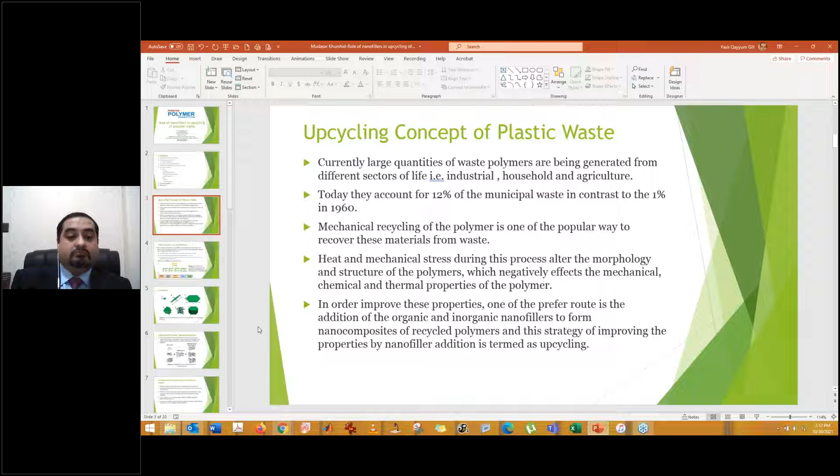Excuse me, Dr. Yasir, can you put your slides in presentation mode, please? Okay. Okay, continue, please. Thank you.

Upcycling concept of plastic waste.

Everybody knows that there is a huge quantity of waste polymer being generated from various sectors of life, throughout the world. It is not related to a specific area of the world—you can't just blame Asia or Europe, it is throughout the world. These sectors are industrial, household, and agriculture.

Today, they account for 12% of municipal waste, in contrast to only 1% in 1960. This ratio can vary depending upon the area, but roughly they account for 12%.

One of the options that the world has utilized in the past and is still being utilized is mechanical recycling of plastic waste. Apart from mechanical recycling, we can also go for landfill, or we can go for incineration or pyrolysis. These areas do offer some advantages, but more or less the products that we develop through them are not of high value, and landfill obviously is not a very good option anywhere in the world.

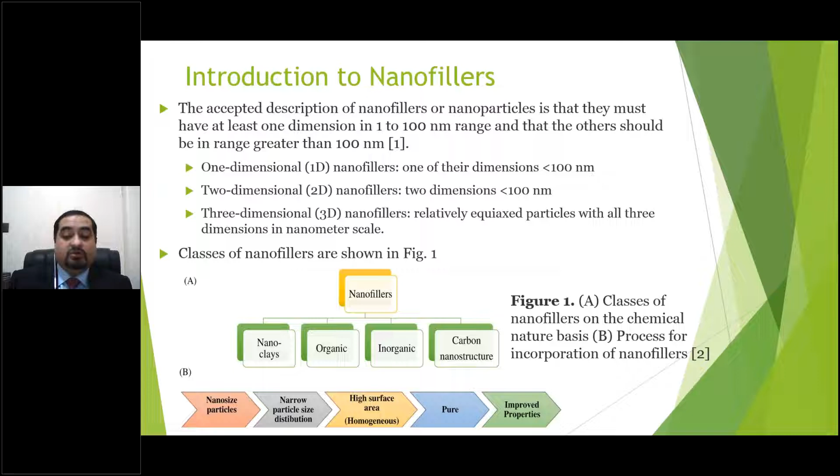We try to make sure that nanofillers are as pure as possible without including too much surface modification. If we incorporate these categories of nanofillers into our polymers, we get improved properties.

There are various nanofillers that you will encounter in the market. Those could be present in the form of a nanoparticle, nanorods, or nanoplatelets.

But when industry tries to utilize them in their polymers, what they end up seeing through a scanning electron microscope or transmission electron microscope are rather their aggregates, or sometimes an assembly of aggregates where different aggregates combine to produce a structure not reminiscent of a nanoparticle.

So they ask the question: we added nanoparticles or nanorod material into our polymer, why can't we visualize it with the help of a microscope? Because the overall structure is present in the form of agglomerates or aggregates.

So our goal is to make sure that once we incorporate the nanofillers within our polymers, we get the least amount of aggregates or agglomerates as they are known. Unfortunately, we cannot eliminate them, especially once we move towards higher weight percentages.

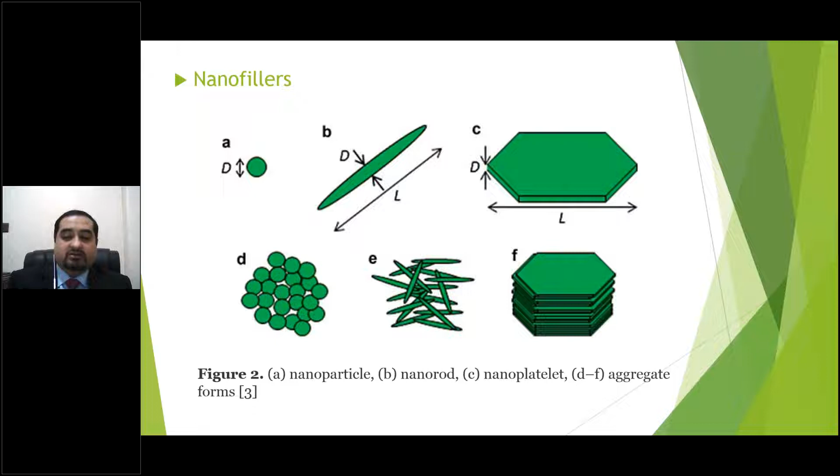One point now being realized by scientists throughout the world is that if we incorporate more and more nanofillers, or higher weight percentages of them, aggregates form in quite large quantities.

So what we can do in upcycled polymer nanocomposites is try to incorporate these nanofillers into our waste polymer and make sure that they remain separated, so the aggregates don't form. This is our basic requirement for any method being used, and this is the goal of this research.

Now, the various methods most of you would know about that can be used for incorporating nanofillers in plastic include melt blending, in situ polymerization, and chemical method.

Now, the most effective method in terms of production value is melt blending, because through melt blending we can use various techniques such as extrusion, injection molding, and other thermal processing methods to ensure our nanofillers get incorporated within our polymers, and we get enhanced dispersion and distribution of the nanofiller along with the removal of agglomerates or aggregates or assembly of aggregates.

If we are able to ensure that, then those polymer properties will be enhanced by the addition of nanofillers. So by keeping in mind this concept...

A number of research works have been carried out within our Department of Polymer and Process Engineering, and I have also carried out this research during my PhD in the Department of Materials at Loughborough University. I would like to discuss a few of those research works with you, showing how by utilizing these various types of fillers we were able to enhance the properties of the polymer.

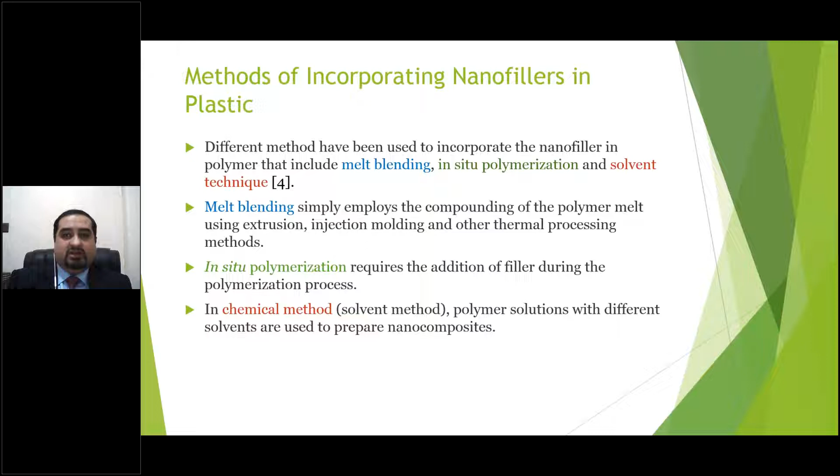Now, the first such research is a comparative study of carbon-based nanofillers for improving the properties of HDPE for potential applications in food tray packaging.

Most of the time, the products we try to develop are those that are in demand in the market, and nothing is more in demand than packaging. Everybody needs packaging, and my second talk is on that point, so we'll continue about that area. This research was published in Polymers and Polymer Composites.

So what did we do in this research? HDPE was blended by a specialized technique with various carbon fillers to produce various composites that included the incorporation of multi-wall carbon nanotubes, graphene oxide, and carbon black on a twin screw extruder. The morphology was characterized and then correlated to the mechanical, thermal, and barrier properties.

The results basically showed us that there was a distinct effect of carbon black on mechanical, thermal, and barrier properties of HDPE in comparison to multi-wall carbon nanotube and graphene oxide.

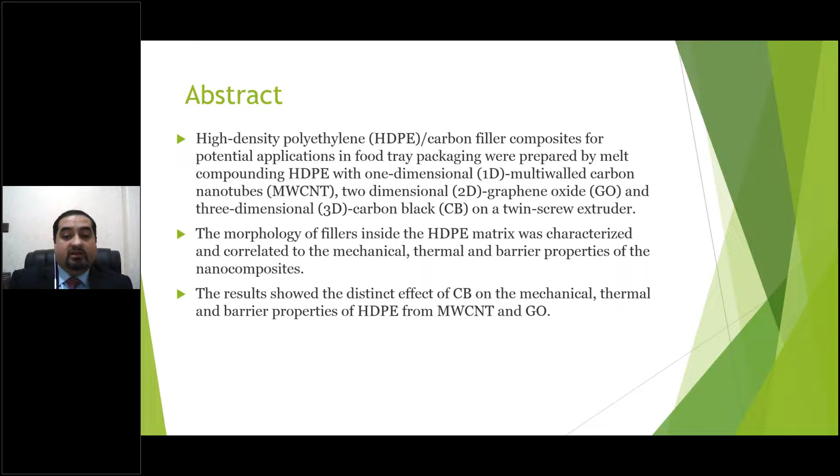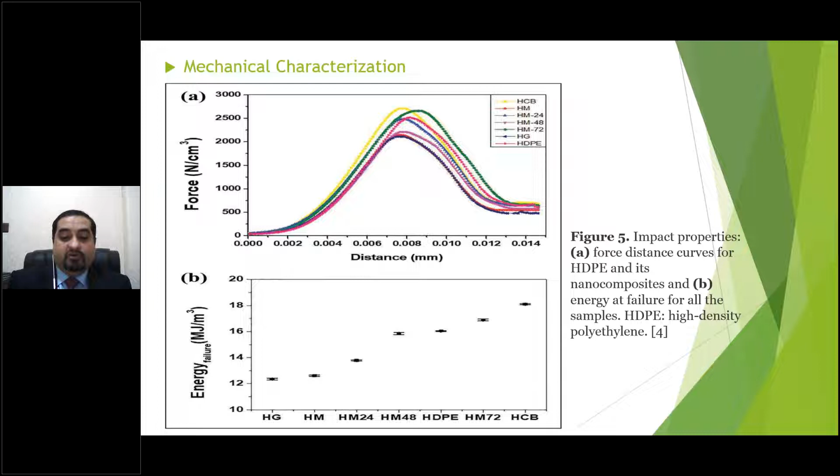We started doing the mechanical characterization of these specimens, and the impact properties showed an enhancement in the properties of carbon black based material in comparison to the other materials we incorporated. This basically gave us a heads up that these materials can be incorporated to produce polymers with enhanced properties. The mechanical characterization showed similar results.

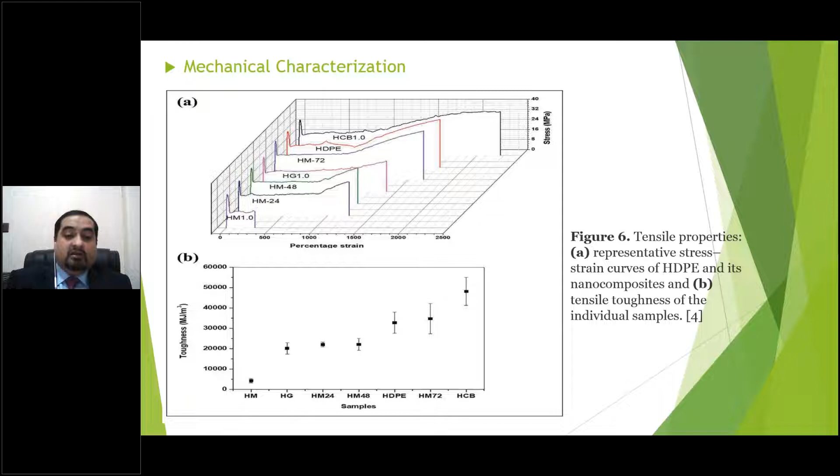Carbon black gave us superior properties in comparison to carbon nanotubes and graphene oxide. We also did water vapor transmission and oxygen transmission testing, and the results were consistent with what we found previously, because the role was played by the platelet structure and morphology of the nanofiller. In this case, graphene gave better properties compared to carbon nanotube and carbon black based particles.

In another research area, we developed HDPE composites with improved mechanical properties using calcium carbonate and nanoclay to reinforce the material. We studied the effect of fillers on tensile strength, toughness, impact strength, and other properties, and found that Young's modulus increased by up to 22.5% for the ternary nanocomposite combining calcium carbonate, nanoclay, and HDPE.

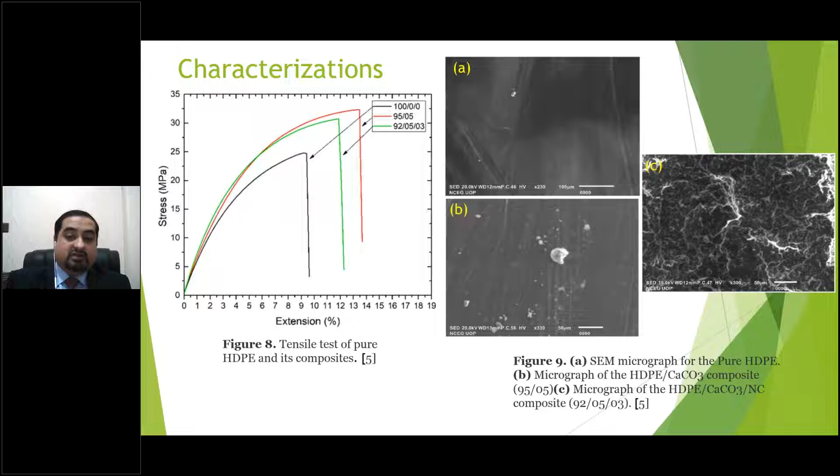We then looked at tensile strength and found enhancement in those properties. We compared 100% HDPE with a 95:5 calcium carbonate based specimen, and a 92:5:3 weight percentage blend of HDPE, calcium carbonate, and nanoclay. Uniform dispersion was achieved, and we saw enhancement in mechanical properties with the incorporation of calcium carbonate. Similar results were obtained for tensile strength, toughness, and Young's modulus.

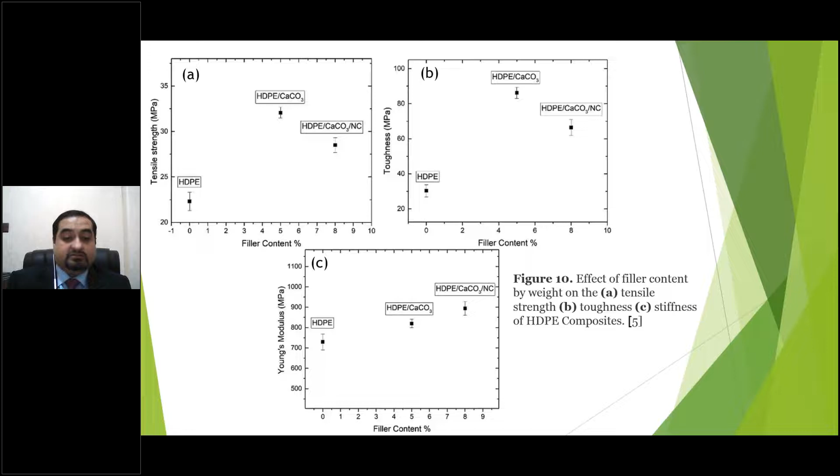Our primary objective in carrying out all of these researches is to incorporate these nanofillers into polymer waste such as HDPE, polypropylene, polystyrene, polyethylene terephthalate, polymethyl methacrylate, and polyvinyl chloride, and then enhance their mechanical, thermal, optical, and barrier properties depending on our requirement.

What is the primary requirement, and where will all of this recycled material go? One starting point could be automotive products. We can take waste, such as polypropylene waste from the masks we use daily, and enhance it using nanofillers to produce various products for the automotive area. My own MSc student, Mr. Mudassar Khurshid, is working in this area with Grand Engineering Private Limited, one of our sponsors for this research, who also produce a lot of automotive parts.

So this is a brief summary of the work we have done in this field, and these are a few of the references we have used.

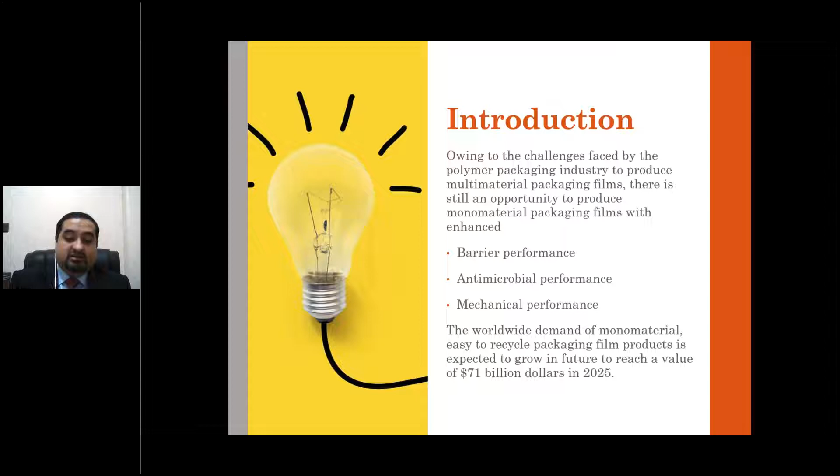And it is also expected that if the monomaterial properties are enhanced, this whole monomaterial based industry can reach an estimated value of $71 billion in 2025. So what are the various trends that the experts are talking about in terms of sustainable packaging? In 2019, the primary trend was to make sure that you design a packaging so that it can be recycled and it can be reused.

Then the next one was replace the plastics with bioplastic or paper and try to remove the packaging. Then at number 6 came the point of trying to move towards monomaterial. You ensure that monomaterials are being used.

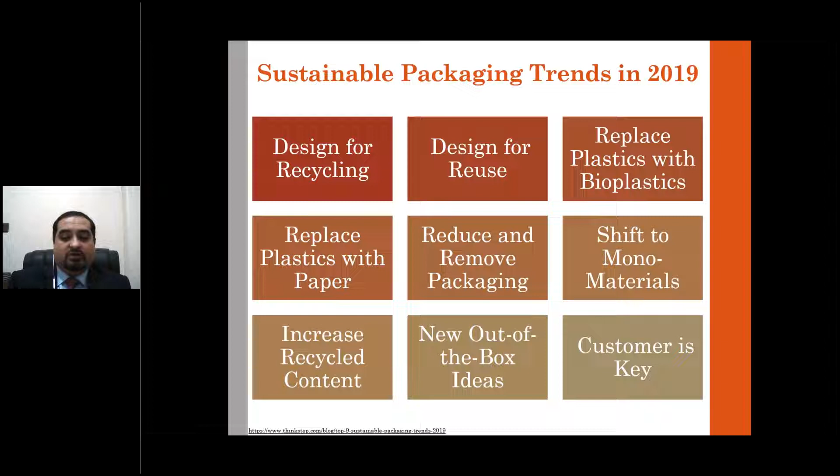Another option that the industry has now adopted quite a lot, you will now start seeing these trends in your shampoo bottles, where the company would write down on the shampoo bottle that their bottle contains 70% recycled content. Another company would say our bottle contains 80% recycled content. So more and more products are now being reused in the packaging, and the rest of the two are: customer is the key, and new out of the box ideas should be adopted.

So in 2020, the trends for sustainable packaging recognized the utilization of monomaterial or single layer plastic as the most primary or important trend that is now being adopted. We have to move towards monomaterial. Multi-layer, multi-material based structures are very good. They are excellent. There is nothing that we have against them, but their recycling causes quite a huge hurdle. And in order to solve them, we need to alter them and replace them.

Reducing the plastic components altogether, that was also one of the packaging trends. Then the same one was repeated: reuse, utilization, replacement with bioplastics and biopaper. With regards to bioplastic, you do need to realize that they have a huge problem with regards to their price. Their price is too high, even up to now.

In Pakistan, the minimum that you can get is 800 to 900, and even those materials don't have the desired quality. Good quality biopolymers, PLA, PBAT, PBS, start at 1200 or even higher prices per kg. Those are the prices in the market. So bioplastics, although a good option, at the moment can't directly replace the multi-layer structures.

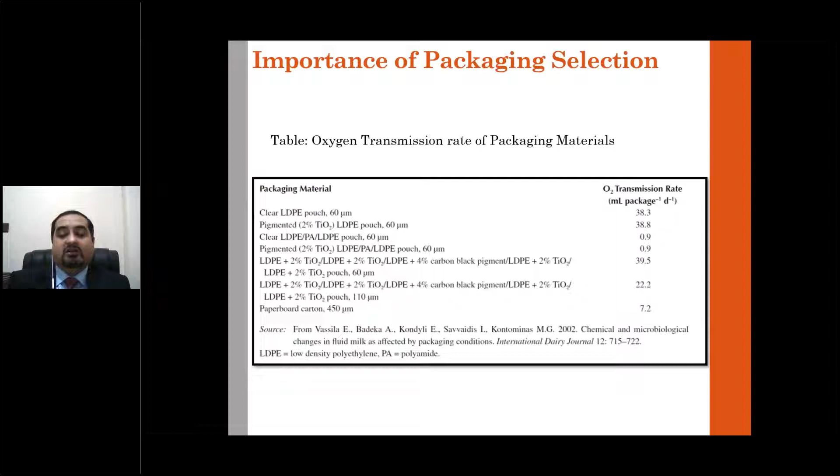When we tried to process these materials through thermoplastic processing using extrusion, we found out through scanning electron microscopy results that there was clear phase separation between the nylon and the LLDPE. Then we tried to enhance this through various compatibilization techniques, and this research is still being conducted, so that is why I have not included the results.

But just to show you that these are the problems you will end up with if you try to recycle these multi-layered structures directly. You then have to make sure that you incorporate other modification techniques in terms of compatibilizers, in terms of chemical modification, to get the desired results. So the recycling of multi-layered structures on its own is not a good option.

So what we can do with these multi-layered structures is separate them out. Separating is another problem on its own. If you try to separate them out, you first have to remove the internal vapor deposited aluminum layer. You then have to separate out the adhesive.

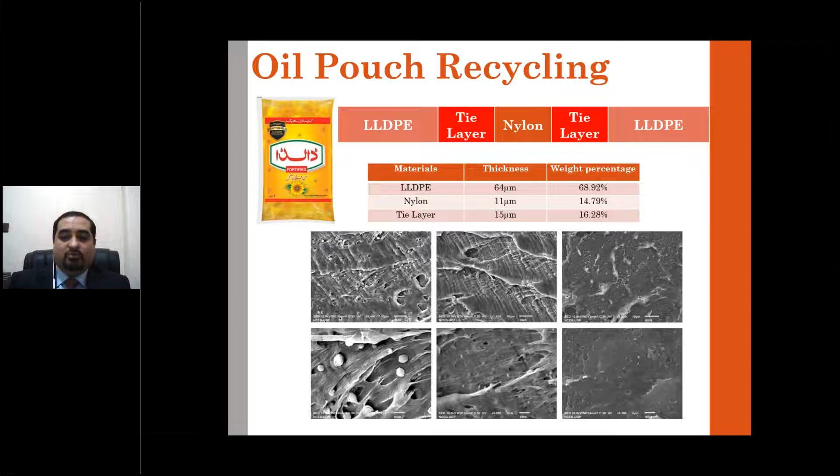You then have to remove the ink. Then you end up with a lot of junk material or a waste material on its own. And from there, you will be able to recover the HDPE layer, polyethylene terephthalate layer, and biaxially oriented polypropylene layer, or simply oriented polypropylene layer. So then it becomes a huge challenge for us. So what are the options that we can adopt?

If these are the problems, we can adopt a single layer printed packaging, or multi-layer monomaterial printed packaging. But even then, in terms of recycling, this will still cause a problem. Or we can move towards a single layer non-printed barcode packaging. This is what our group is trying to now suggest, that remove all the printing. If we remove the printing, we can use the barcodes, and that can be very effective. Or we can use the same multi-layer structure, but you need to down gauge them.

So in what direction are we moving within this Department of Polymer Process Engineering? We are trying to adopt the technique through which we can develop multi-layer monomaterial based structures, or single layer structures that will have enhanced properties. And one of the routes that can be adopted in enhancing the properties of polymers so that they can meet all the requirements is by the utilization of various nanofillers. So polymer nanocomposites can be adopted to enhance the properties. These include clays, graphene, silicates,

and as a result of them, we always try to enhance the barrier performance against water, oxygen, and carbon dioxide. And we try to achieve these properties by making sure that we get a good tortuosity path created within the polymer by the addition of nanofiller. We get enhanced dispersion and distribution of the nanofiller, and we try to eliminate or restrict any of the agglomerates.

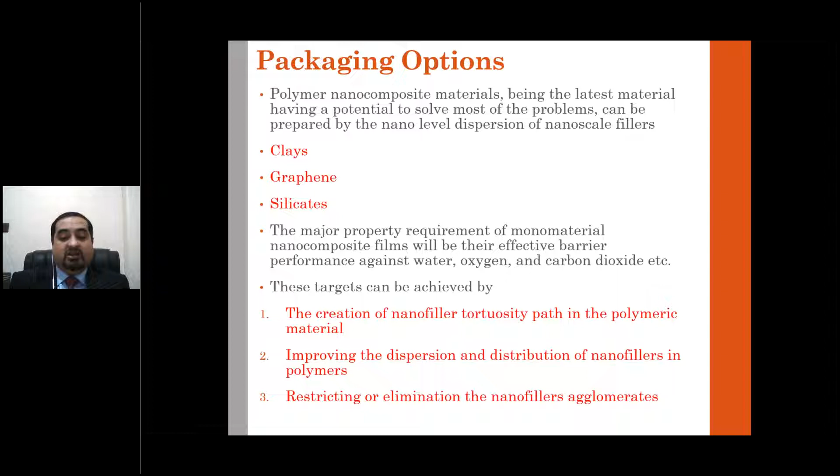Now within this, I have worked in this area in the past, and I am still working in this area. One of the case studies is the permeation characterization and modeling of polyethylene clay nanocomposites for packaging. It was published in Polymer Bulletin. In this work, we utilized kaolin clay and sodium MMT clay to enhance the overall properties of HDPE so that it can then be utilized in the industry.

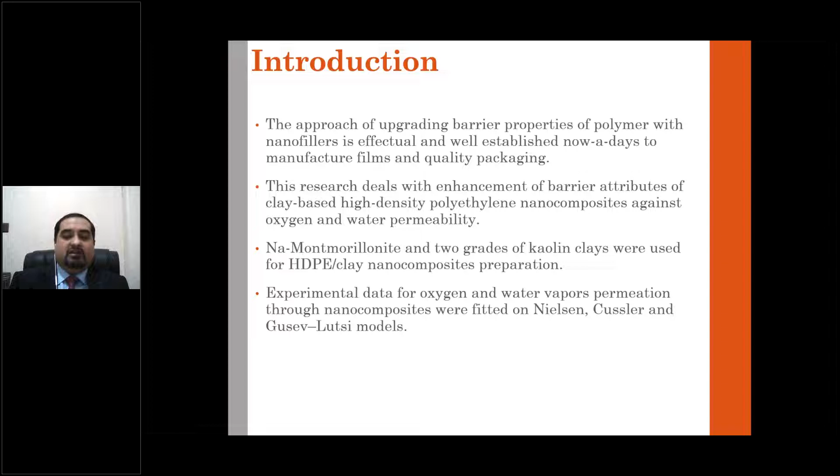So based upon these initial results, we were then able to compare what would happen if our material is fully exfoliated, what sort of properties we can expect, and if it is not exfoliated, then just by utilizing the pre-blending techniques, up to what extent we can get enhanced properties. There are other options of intercalation or macro composites that can be studied based upon these initial results.

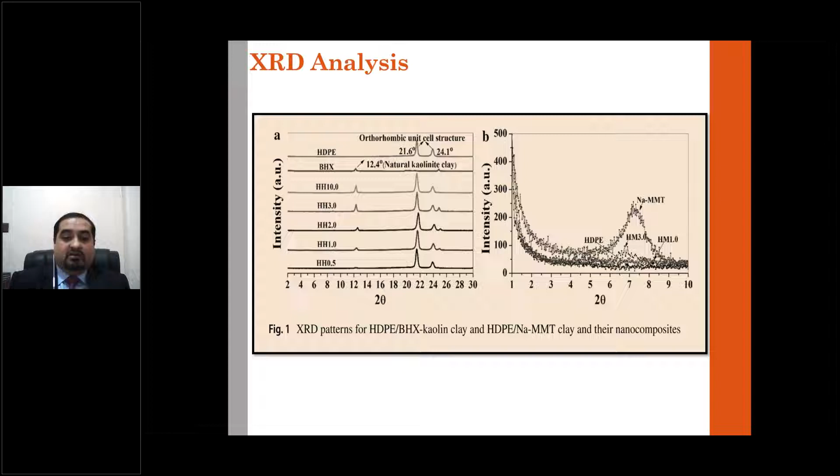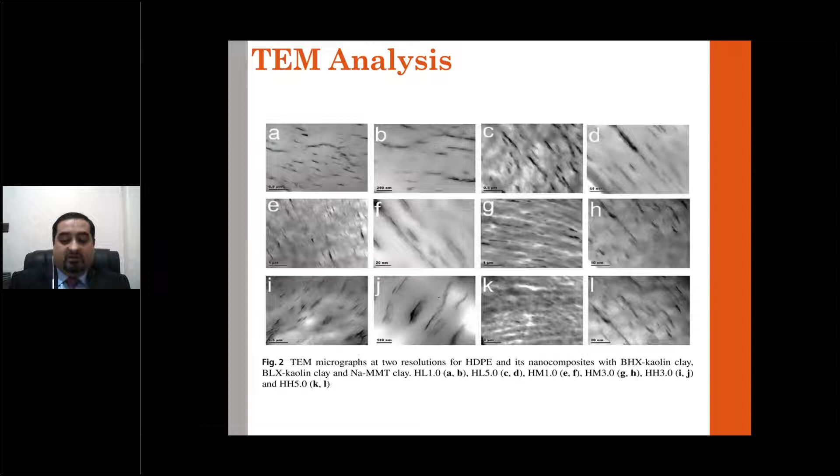Now the TEM results showed good dispersion and distribution, but also the presence of a few agglomerates, but most of the time the tortuosity path was there, and along with it, good dispersion and distribution of nanofillers within our material. We then looked at the overall aspect ratio calculations by utilizing the TEM results along with ImageJ, and we found out that we were able to get a good aspect ratio.

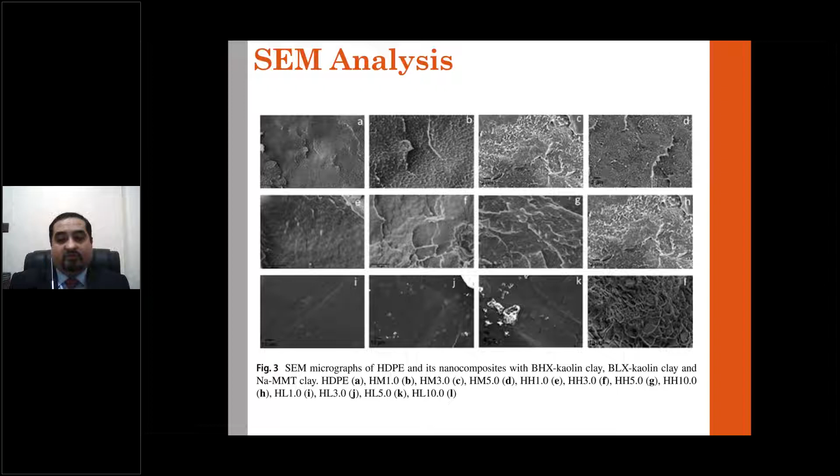Now, one of the things that you need to understand is that in terms of kaolin, we were not able to separate out individual layers, but there was a combination of layers present in the form of an aggregate. This aspect ratio basically represents the overall dimensions of those aggregates. SEM results also showed us good dispersion and distribution, and only for very high weight percentages did we get a few agglomerates and some phase separation within our material.

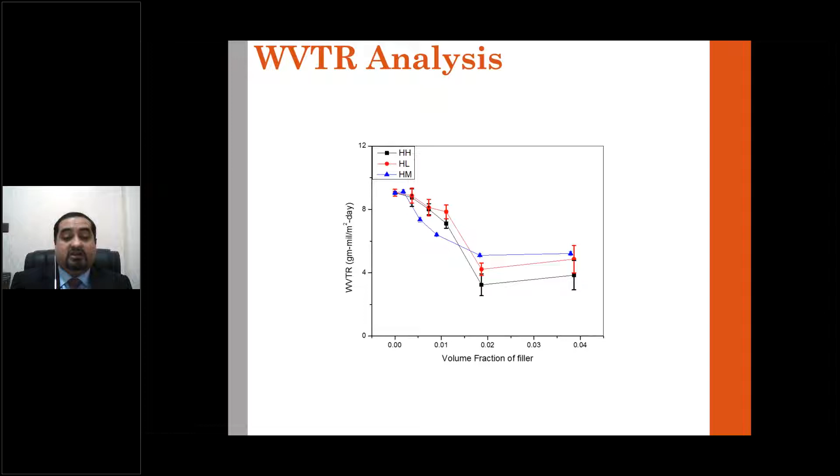WVTR analysis, or the water vapor transmission rate, which is of prime importance, gave us good reduction in the properties and showed us that if we try to incorporate up to 5 wt%, then the water vapor transmission rate will decrease. The same was true for oxygen transmission rate. Along with these properties, we also analyzed the internal morphology by utilizing polarized optical microscopy, and it showed a reduction in the overall size of the spherulites by incorporating various nanofillers.

So in terms of summary, we were able to get good reduction in the WVTR and O2TR by utilizing up to 5 wt%. As we move toward 10 wt%, the enhancements started to deteriorate, and we then found out that this is the range up to which we can expect good results in terms of the barrier properties and also in terms of internal morphology of the polymer.

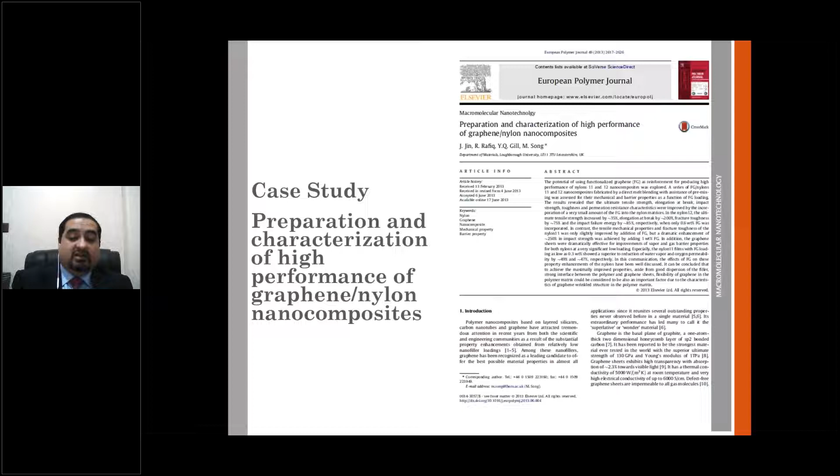Now, another work that has been done by myself in this area is for the high performance graphene nylon nanocomposites. In this area, we were able to develop nylon 11 and nylon 12 functionalized graphene nanocomposites to see what sort of effect it would have on the ultimate tensile strength, elongation at break, impact strength, toughness, permeation resistance, by incorporating as low an amount of functionalized graphene as possible.

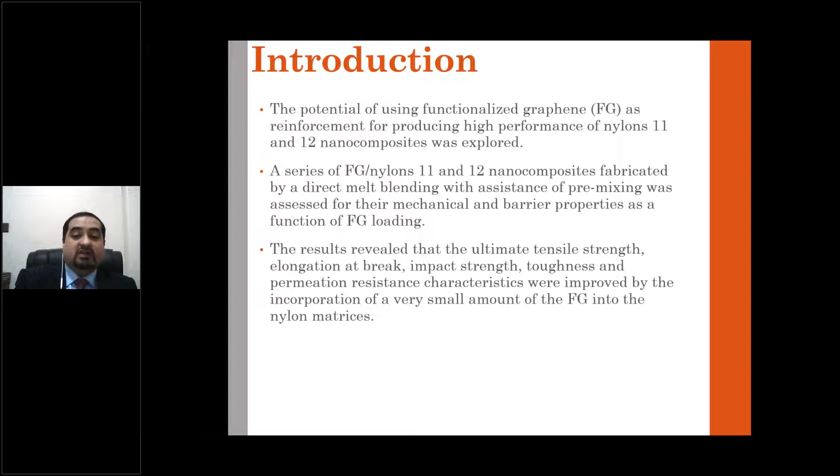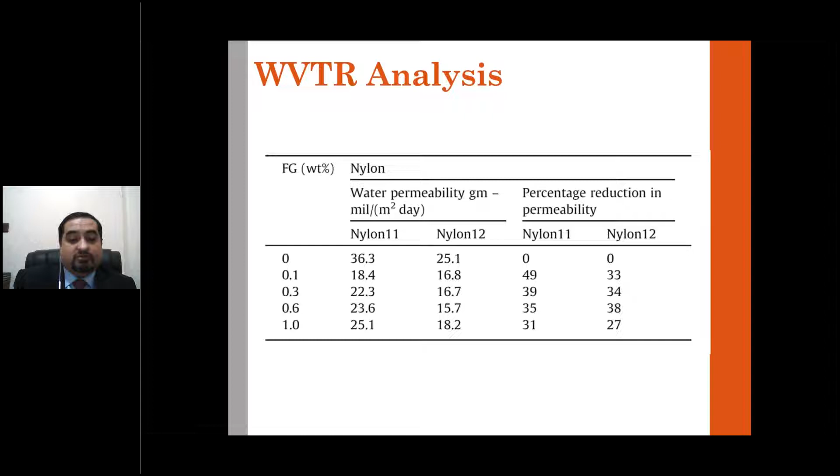So based upon these results, what we can conclude is that if we are able to use monomaterials based upon the two case studies that we have just discussed, and if we are able to then combine the monomaterials with the various nanofillers added into them to produce multi-layered structures, those would then be upcyclable.

Okay, because of the presence of nanofillers, we have already established that if nanofillers are present and you get good dispersion and distribution, and make sure you get good interaction between the polymer and the nanofiller, you will be able to get good upcyclable material. And finally, based upon the various requirements of the future, we can then incorporate various functionalities into our polymer to get materials that are much more smart.

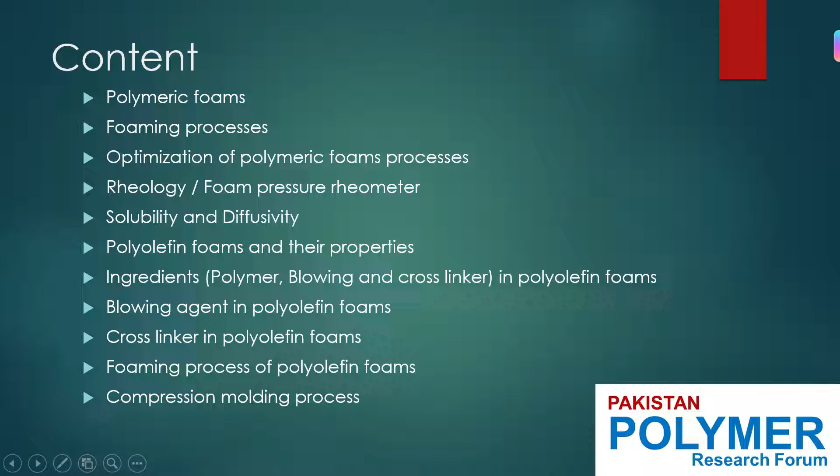Okay, so starting from polymeric foams. Polymeric foams are polymers that contain cells dispersed throughout the polymer matrix. And use of polymeric foams in today's technology continues to grow at a rapid pace throughout the world. There are numerous reasons for such growth, which include the key properties of polymeric foams, including lightweight, excellent strength to weight ratio, superior insulating abilities, energy absorbing performance, including shock, vibration, and sound, and the comfort feature of polymeric foams.

According to marketresearch.com, the global polymeric foam market size is expected to reach $153.8 billion by 2027 at a compound annual growth rate of 3.8%, while the global polyolefin foam market is expected to reach $12.53 billion by 2027, growing at a CAGR of 7.2% from 2020 to 2027. This data has been taken from marketresearch.com.

So, in continuation of the introduction of polymeric foams, they can be viewed from different perspectives, which include their density, cell size, expansion ratio, foam morphology, etc. Speaking individually, if I talk about the density range, they range from 1.6 kilogram per meter cube to over 960 kilogram per meter cube. And if I talk about the expansion ratio, they can be viewed as high density, medium density, low density, and very low density. All have their certain ranges. And if I talk about the foam morphology, they are classified as open cell or closed cell foams.

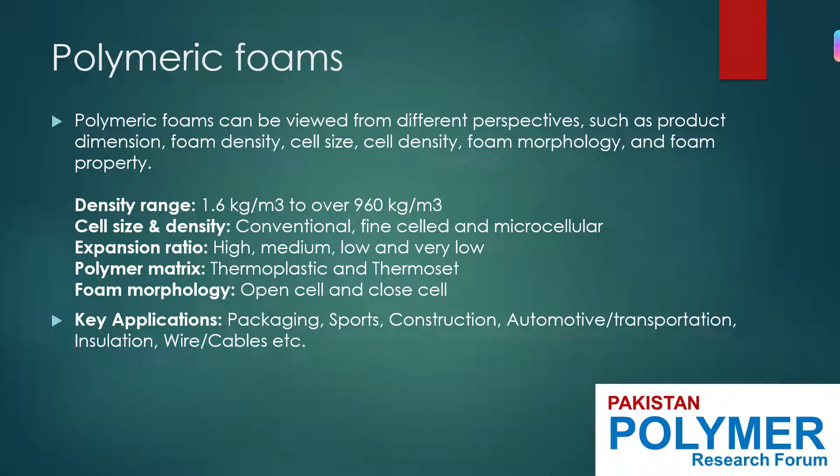As an introduction, if I talk about the key applications of polymeric foams, they include packaging, sports, construction, automotive, transportation, insulation, wire and cable, etc. So moving ahead with the foaming process, most foam polymers are produced by dispersing a gas throughout a fluid polymer phase and stabilizing the resultant. It is a complicated phenomenon which involves thermodynamics, reaction kinetics, melt gas rheology, gas diffusion, and permeation, and others.

Foaming of polymers can be carried out either by mechanical, chemical, or physical means. Thermal decomposition of blowing agents, generating either nitrogen or carbon dioxide or both by application of heat and pressure. I'll be talking about this process, by the way. Secondly, there's volatilization of low boiling liquids within the polymer, incorporation of microspheres into a polymer mass, expansion of gas-filled beads by application of heat, or expansion of these beads in a polymer mass by heat of reaction.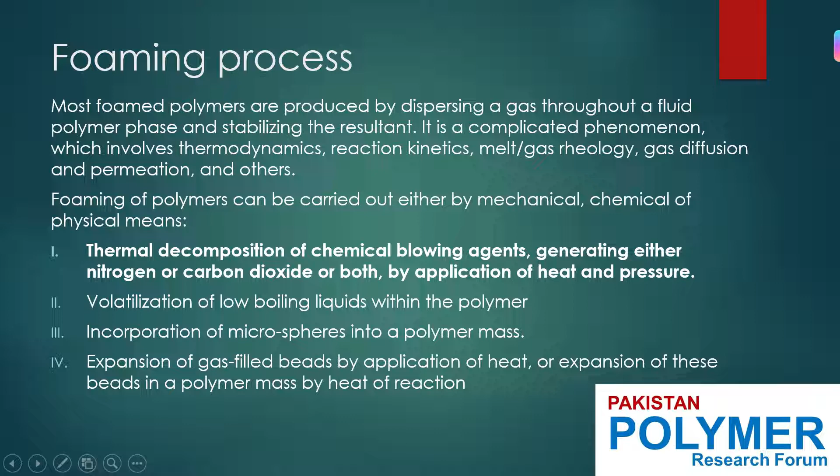Coming to the core of my work, which is optimization of the polymeric foam process. Although I'll be talking about polyolefin foams, at first I'll be covering polymeric foams in general. If I convert them into steps, the steps that we need to follow to optimize any sort of polymeric foaming process, we can split into 6 steps.

Number one is polymer analysis. Whatever the polymer is, it could be EVA, it could be PU, it could be any other polymer, we have to make an analysis of the polymer to understand what properties that polymer has so that we can get those properties in the end product. And the second step is chemical characterization of chemical blowing agents, cross-linking agents, or other ingredients which are present in a certain formulation.

The next step is rheological investigation, which includes shear viscosity, extensional viscosity, and similar factors. The next is gas solubility measurement, number five is gas diffusivity measurement, and the last step is cell nucleation and growth study.

Moving on to optimization of the polymeric foam process, as mentioned earlier, we have to follow certain steps. I won't go into the details of polymer analysis and chemical characterization of different ingredients. I'll be talking about rheology first.

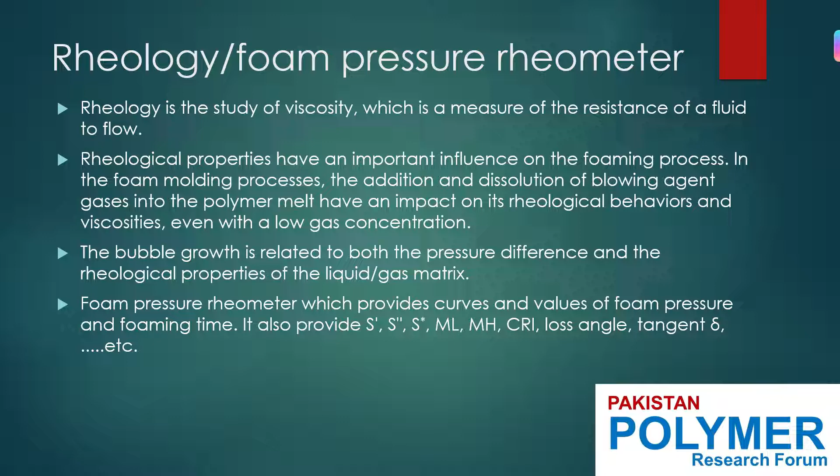After rheology, I'll talk about solubility and diffusivity measurements. Starting with solubility: foam production involves preparing a single phase, which includes the polymer and blowing agent solution, followed by generation of bubbles, also known as cells, triggered by thermodynamic instability, and then stabilizing the bubble structure in the surrounding medium. This is a generic foaming process.

Solubility defines the maximum amount of gas that can be dissolved in a certain polymer under a certain pressure. To generate the thermodynamic instability that triggers foaming, the surrounding pressure has to be lowered beyond the solubility pressure. Therefore, solubility and related information are quite important for the foaming process. There are also certain mathematical methods available to measure solubility.

I'll not be talking about the details of those methods, which can be provided on request.

The next thing is diffusivity. Cell growth is driven by the pressure difference between the cells and its surrounding, with the blowing agent diffusing into the cell. Generally, a blowing agent with lower diffusivity has an edge advantage to produce large expansion foams. So you can see how important these parameters are, the solubility and diffusivity.

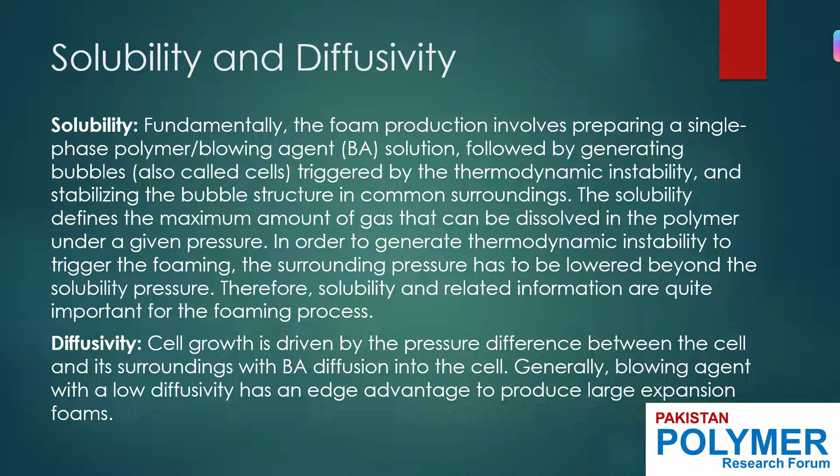Polyolefin foams. Now I'm coming to the core of my work, which is based on polyolefin foams. Polyolefins are tough, flexible, and resistant to chemical and abrasion. These are their physical properties.

Most polyolefin foams have a closed cell structure, which makes the foam suitable for applications where buoyancy is important. That's why they're used in leisure and sports related applications. They can also provide a certain amount of resilience, and that's why they're used in related applications.

If I talk about polyolefin foams, the certain polymers that come under the banner of polyolefins include polypropylene, polyethylene, and EVA, which is ethylene vinyl acetate. Based on the basic properties of the polymer, we can get the same properties in the end product also.

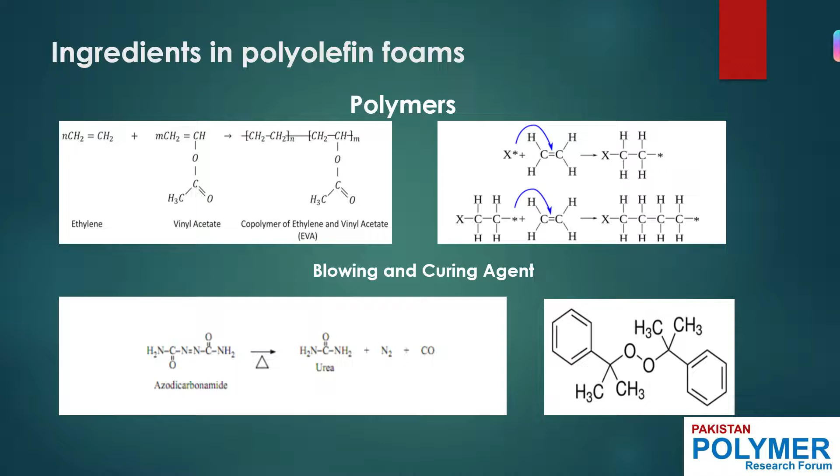Moving ahead with the blowing agents in polyolefin foams, most polyolefin foams are manufactured by dispersing a gaseous phase throughout the polymer matrix. This is a generic polymeric foaming process. The substance that produces cellular structure in the polymer is defined as a blowing agent.

The gas used for foaming can be classified into two categories based on the mechanism: physical blowing agents and chemical blowing agents. While choosing a chemical blowing agent, it is very important to consider two things. The first is the decomposition temperature of the chemical blowing agent. It should not be too high.

If it is too high, the polymer melt strength is low at the foaming temperature and is not strong enough to maintain the bubble structure. And if the decomposition temperature is too low, the polymer melt is too rigid, which constrains foam expansion. The other issue is the residue of decomposition products and the generated gases from a chemical blowing agent.

Commercially, there are different chemical blowing agents available, which include DNPT, dinitrosopentamethylenetetramine, also ADC, azodicarbonamide, and OBSH, oxybisbenzenesulfonyl hydrazide. But for polyolefin foams, mostly ADC is used.

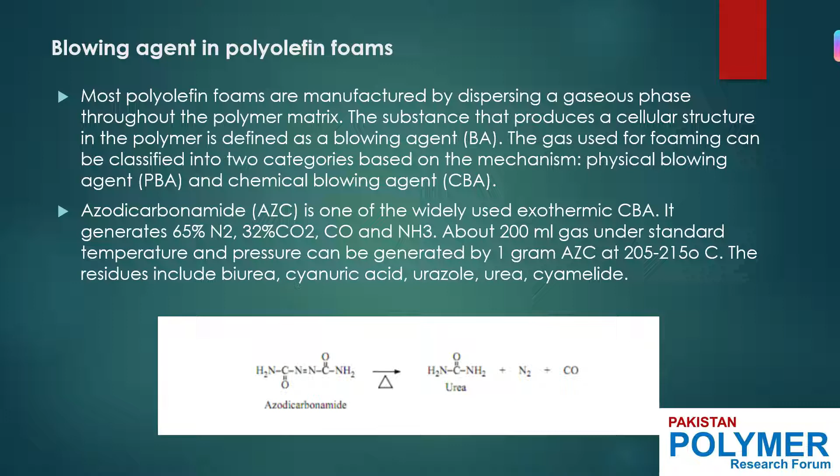The next important ingredient after the blowing agent is a cross-linking agent. Cross-linking is basically a chemical bond between adjacent polymer chains. For polyolefin elastomers, there exist three main types of cross-linking procedures.

Physical cross-linking by electron or gamma radiation, chemical cross-linking by agents such as peroxides, and silane cross-linking. I'll be talking about peroxide cross-linking.

Generally, the reaction of peroxide decomposition is first order. The rate parameter is called the half-life time, which describes the time needed for the decomposition of 50% of peroxides. So the selection of proper peroxide is based on its decomposition temperature.

Foaming process in polyolefin foams is almost the same as in any other polymeric foaming process. It can be divided into two major classes: the continuous process or the batch process. Compression molding, which I am concerned with, is a batch process.

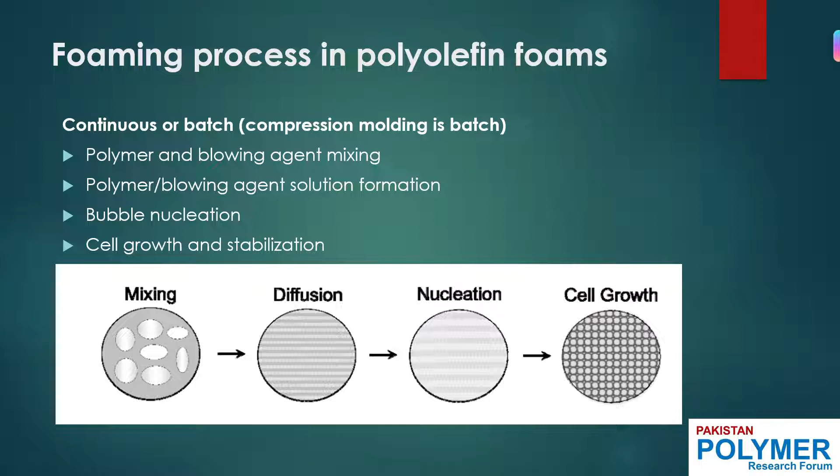This is about the compression molding process. Generally speaking, compression molding is a manufacturing process in which three-dimensional shapes are created using heat and pressure. Material is molded and placed in a temperature-controlled cavity, then shaped under pressure via a hydraulic press.

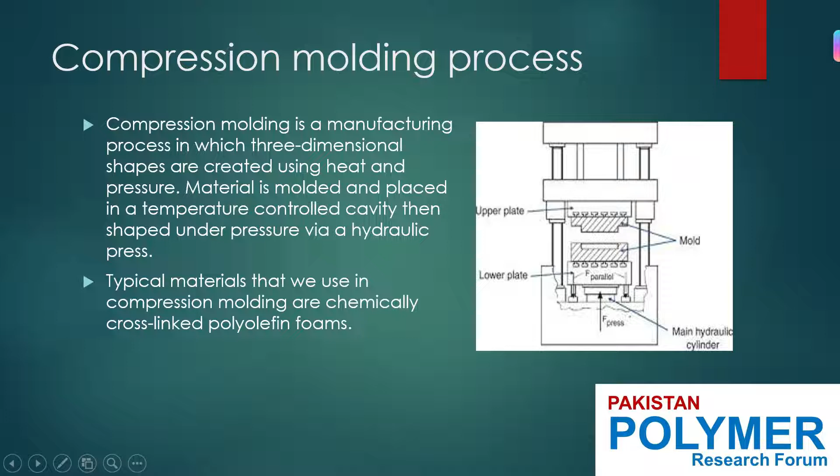Basically, there are two plates, upper and lower, heated to a certain temperature. Inside the plates there is a mold cavity where the material is placed, and hydraulically the press is closed, pressure is applied, a temperature is given, and a certain time is provided, and products are manufactured through these techniques. Most polyolefin foams are manufactured through the same technique.

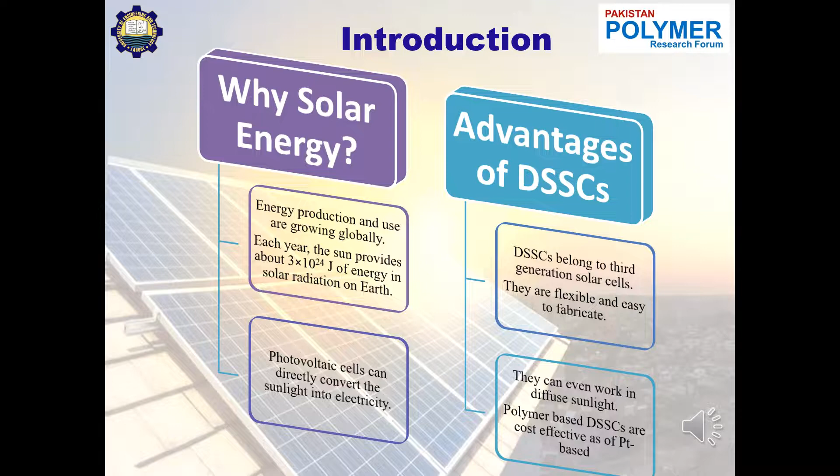Next is electrolyte. Electrolyte restores the dye to its initial state after it donates electrons to the semiconductor's conduction band, or you can say that the major function of electrolyte is to reduce the dye which is oxidized due to the discharge of electron to its semiconductor. Last is counter electrode. The function of counter electrode is to restore the initial state of electrolyte and accelerate the reduction process of electrolyte which gets oxidized after giving electron to the dye.

Now moving further, I would like to discuss why conductive polymers should be used instead of platinum, and applications of DSSCs. First of all, why conductive polymers should be used: they are readily available at low cost, so they are cost effective, and moreover they are easy to fabricate. Polymer based solar cells are flexible and they can work even in diffuse sunlight with the same efficiency as they work in bright sunlight.

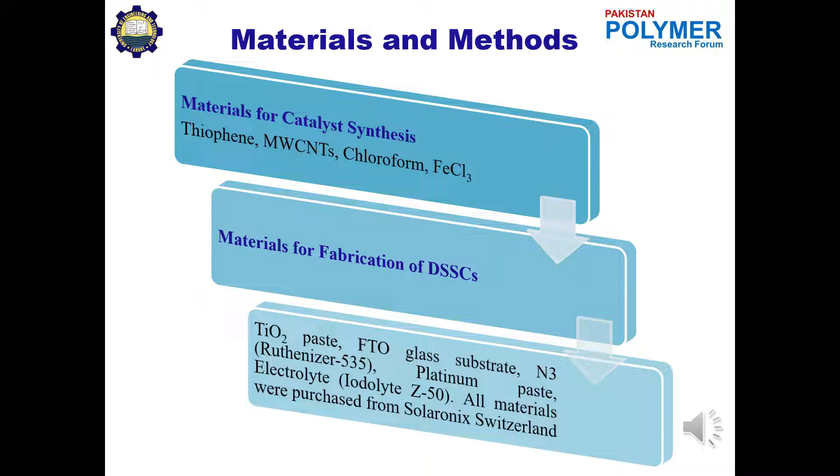After materials, I am going to explain the synthesis procedure of nanocomposite based on polythiophene and multi-wall carbon nanotubes. First of all, a calculated amount of multi-wall carbon nanotubes was poured in 50 ml chloroform in a round bottom flask, and the mixture was sonicated at room temperature for 30 minutes for proper dispersion of MWCNTs. After the MWCNTs were dispersed, 1 gram ferric chloride solution was made with 100 ml of chloroform, and this solution was added to the sonicated solution of MWCNTs. Further sonication was done for 30 minutes for the proper dispersion and oxidation of MWCNTs.

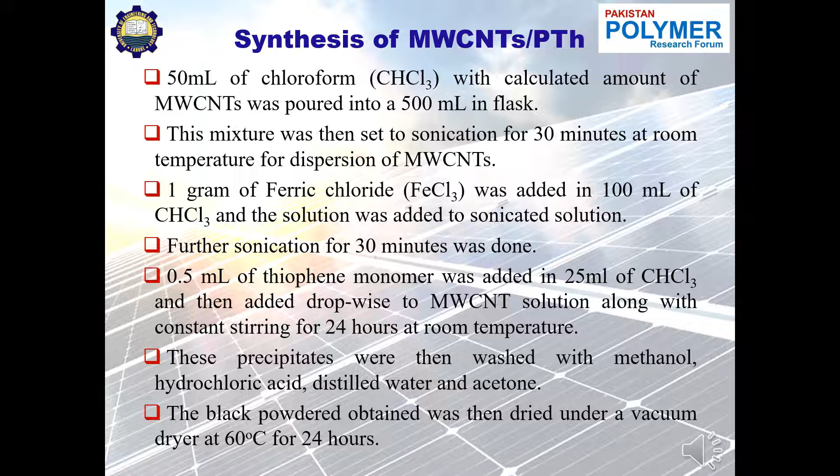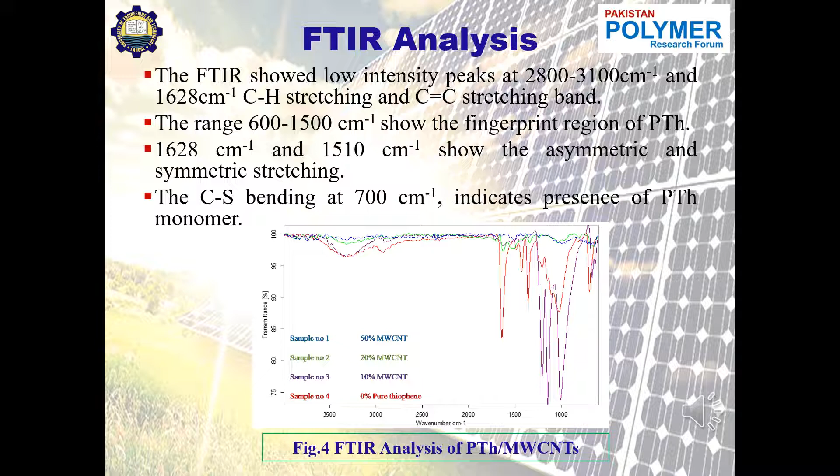Moving to the characterization of the synthesized nanocomposite, first of all, the FTIR analysis. The FTIR analysis was done to check whether chemical bonding of polythiophene with MWCNT has occurred or not. The FTIR showed a low intensity peak at 2800 to 3100 per centimeter and a peak at 1628 per centimeter, which shows carbon-hydrogen bond stretching and carbon-carbon double bond stretching. Secondly, peaks in the range of 600 to 1500 per centimeter showed the fingerprint region of polythiophene. Peaks obtained at 1628 per centimeter and 1510 per centimeter show the asymmetric and symmetric stretching of bonds. Another sharp peak was obtained at 700 per centimeter, which indicates the presence of thiophene monomer.

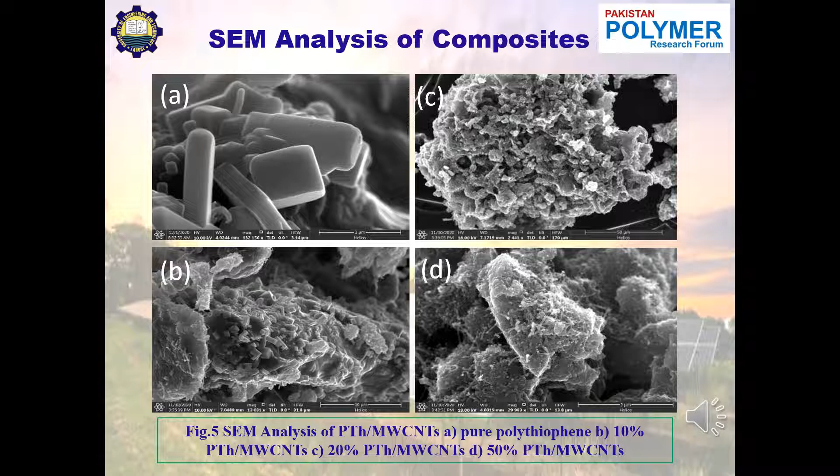After characterization of the nanocomposite, fabrication of the DSSC was done. First of all, titanium dioxide paste was deposited on the glass substrate, and the substrate was then sintered in the furnace at 450 degrees Celsius. The substrate was then dipped in the dye solution for 24 hours, and for the counter electrode, the polythiophene and MWCNT paste was deposited on the substrate with the help of the doctor blade method. Both of the electrodes, photoanode and counter electrode, were joined, and liquid electrolyte was injected through a dropper or syringe, and the fabricated cell was obtained, and IV characterization was done.

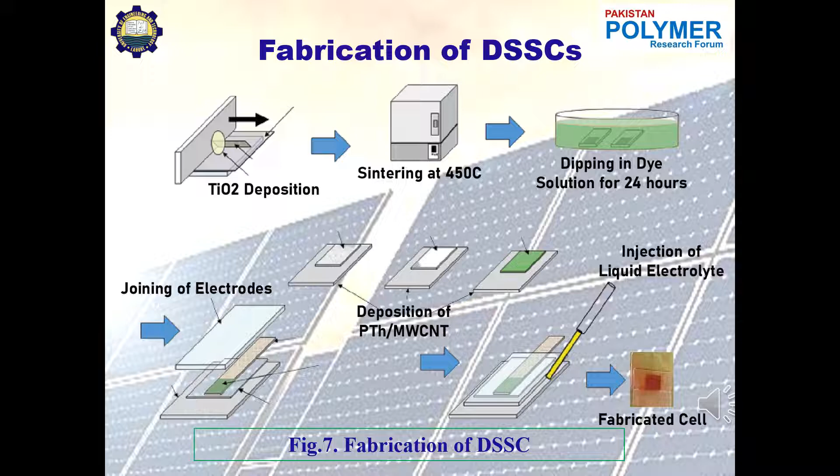So the conclusion is that polythiophene and MWCNT based composites are electrochemically stable and possess high catalytic activity. We also conclude that DSSC with polythiophene and MWCNT shows power conversion efficiency slightly higher than that of platinum-based DSSC. Moreover, we conclude that polythiophene and MWCNT could be an alternative to platinum material for the large scale production of DSSC. That's all from my side.

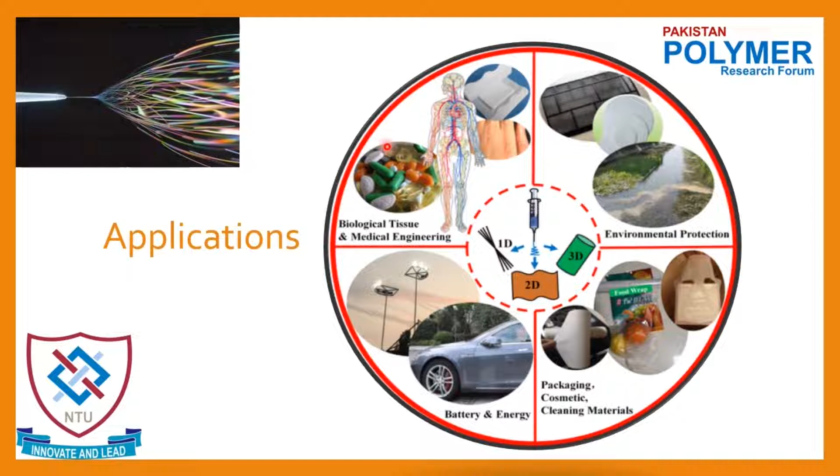So nowadays, even 3D nanofibers are being fabricated and utilized, especially in biological and tissue engineering applications. Other applications of nanofibers include protective garments as well as drug releasing materials, energy storage devices, solar cells, filtration, and many other applications. So this means they are being utilized in almost every field of life science.

So as we have discussed, these nanofibers have enormous applications. Why? Because there is something important or special about their properties. So talking about the properties of nanofibers, they are materials having a high surface area to volume ratio, and they are very easy to fabricate using, for example, the electrospinning technique.

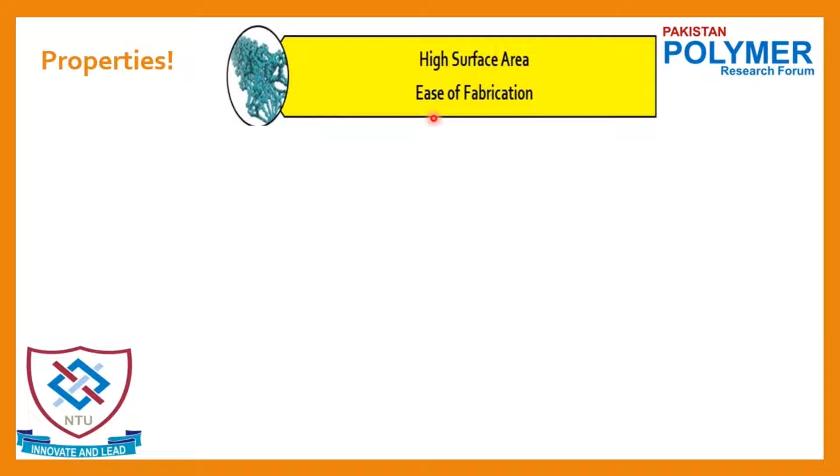You can try hundreds of polymers depending upon your end application, both natural and synthetic ones, and you have high porosity and interconnected pores. This means you will have proper gaseous and liquid exchange if you want, because there is a porous structure available, and these materials can mimic the extracellular matrix of our body. So this is very important for biomedical applications.

Furthermore, these are the only systems known to have 100% drug encapsulation efficiency. For a pharmaceutical system, you need to have a maximum amount of drug entrapped inside your drug delivery system. So these are the only systems with 100% drug loading efficiency, and you can control the drug release, whether you want slow release, abrupt release, or sustained release, by the selection of polymers.

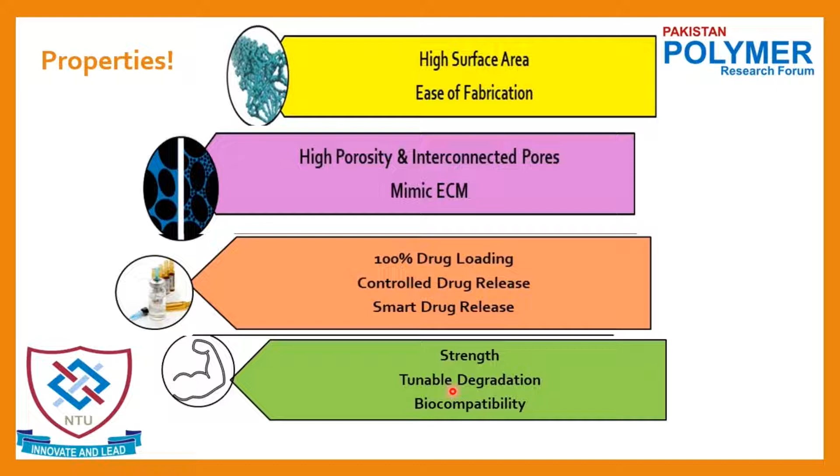And then you have smart drug release. This means the drug is triggered by some external stimuli. So these are smart dressing systems as well. These are also powerful, they have strength, and you can have tunable degradation, like slow or faster degradation depending on the polymer, and good biocompatibility.

So as we discussed earlier, we have a list of polymers that we can select to fabricate our nanofibers, both natural and synthetic. So we can choose either synthetic polymers or biopolymers. The selection is very important because it will determine our final properties, or we have to design a nanofiber based system depending upon our end application. So when you have a list to decide from, it becomes tough.

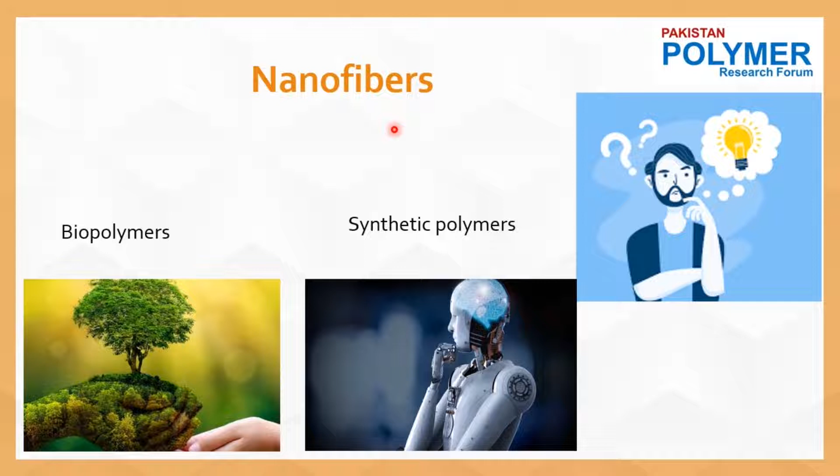So there is always a game or challenge when we try to select among natural and synthetic polymers. Their properties are so different. I think every one of us is aware of the properties of natural and synthetic polymers. Natural ones are naturally occurring, they are mostly from biological sources, and they are biodegradable and biocompatible.

On the other hand, synthetic polymers are not biodegradable. This means they have limited applications, and they are also not biocompatible. Some synthetic polymers are biocompatible, however, they are not from renewable resources.

As my talk is regarding the biomedical application of these biopolymeric nanofibers, first of all I would like to talk about diabetic patients. As we know, diabetic patients have to either swallow a pill or inject insulin into their body. So that is a painful procedure.

So instead of using these systems, we can use a nanofiber based patch attached to our skin that can release the insulin through our skin into our body. Then we don't have to inject ourselves with insulin. This means this is a more patient compliant product compared to either oral drugs or injections.

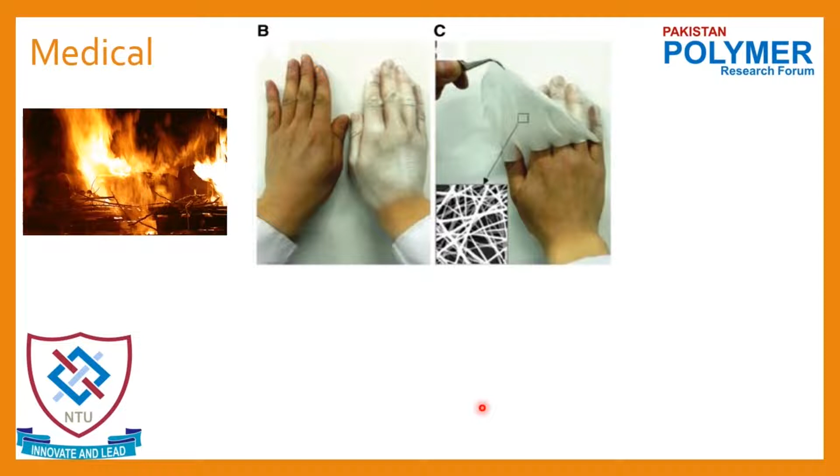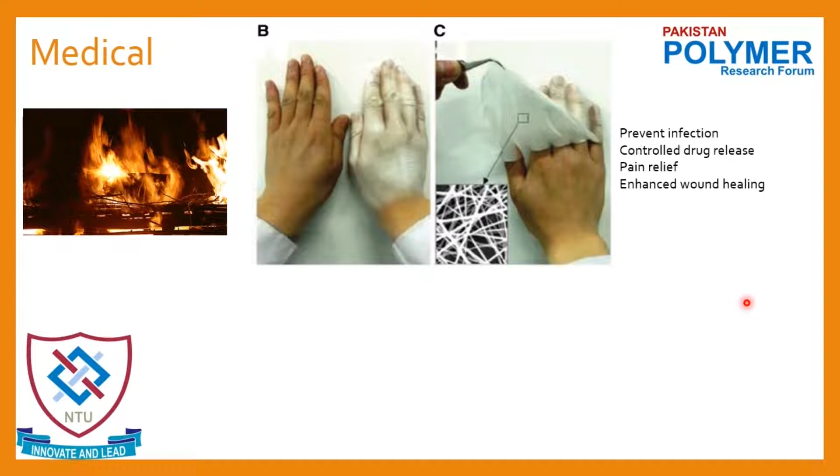At National Textile University, our group is already working on various applications of biopolymeric nanofibers in medical and healthcare. For example, we have developed a wound dressing that can be applied to burn wounds. These dressings showed that they prevented infection and provided the drug in a controlled manner, for example for pain relief and antibacterial activity, and we checked that these dressings enhance wound healing. So this means these are very suitable.

Similarly, these nanofibers are being used for cancer treatment. Various chemotherapy agents, hyperthermia-inducing agents, immunotherapy agents and gene therapy agents are entrapped within the nanofiber, and they are placed at the cancer site where they release these agents and kill the cancer cells through apoptosis or other processes. So these are also being used for cancer treatment.

Furthermore, these nanofibers are nowadays being utilized for various human issues. For example, women are prone to yeast infections and microbial infections down there. So there are various applications of these nanofibers. Among different available techniques, these are now being used as a mucoadhesive drug delivery system for the vagina. So these are also being used for treating vaginal cancer, ovary issues, and other issues as well.

Another important aspect of these nanofibers is that they can be used as a transdermal patch. Transdermal patches are normally applied on the skin instead of swallowing a pill or taking a tablet or capsule, which becomes difficult for children and some old age persons. You just have to apply the patch on your skin.

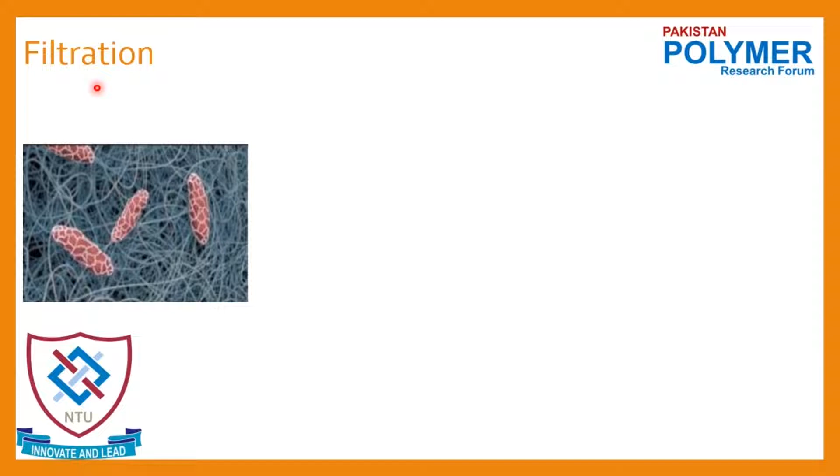Another important aspect of these nanofibers is their filtration efficiency. They are highly efficient in filtering various pollutants. These nanofibers can be used to filter microbes and viruses from the air. Their application is increasing day by day because of their small size; the pores are even smaller than viruses and microbes. So microbes cannot pass through the membrane of nanofibers, and you can get premium protection using these nanofibers.

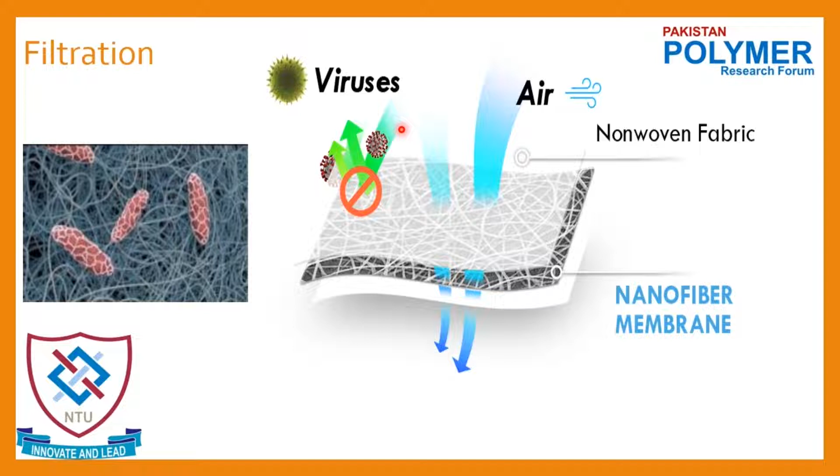Another company has used a nanofiber membrane sandwiched between two other non-woven fabric surfaces, and they have tested it against different viruses and microbes, and the air becomes very clear after passing through these nanofibers. So we can say that these nanofibers have an enormous amount of biomedical applications. Similarly, they can protect you from COVID and other viruses and transmittable diseases.

Respected viewers, what we have discussed so far is that electrospun nanofibers are very easy to fabricate, and they have properties that are unmatchable with conventional polymers. So we can conclude that nanofibers possess great potential for biomedical applications due to their high drug loading efficiency, ability to release the drug in a controlled or desirable manner, their biodegradability, biocompatibility, and other aspects. And they are better compared to their counterparts or market products, and they are easy to fabricate.

However, producing defect-free nanofibers with reproducible results is not that easy because there are so many parameters that you need to control precisely. For example, when we talk about polymer properties, we have molecular weight and solubility. Definitely, they are going to impact the final properties. If you are not in the optimum range of molecular weight, you will not get fibers. Similarly, the solubility of your polymer in that particular solvent is very important.

And when we talk about polymer solution interactions, we have concentration, how much polymer you are going to add with respect to weight, its viscosity, like viscosity of the solution, conductivity, surface tension, pH, and one thing that is very important is the additive. If we are adding some pharmaceutical agent or nanoparticles or metallic particles or anything like that, it will change all these properties in viscosity, conductivity, surface tension, pH. So it will interfere with the electrospinning process. So we have to fine tune.

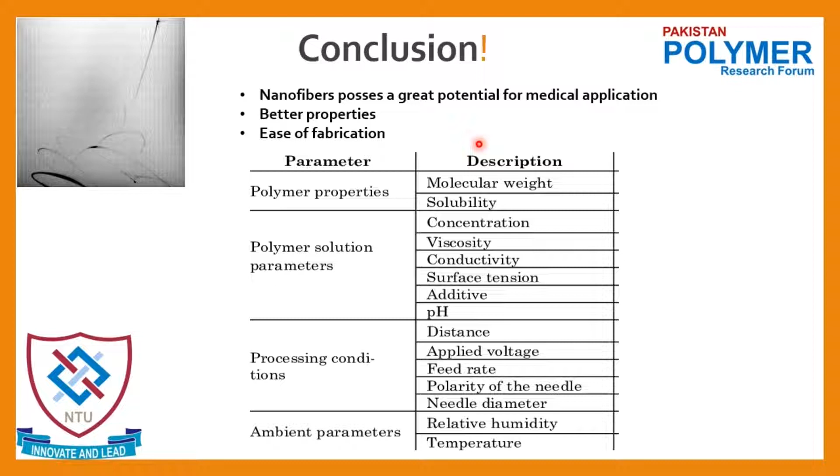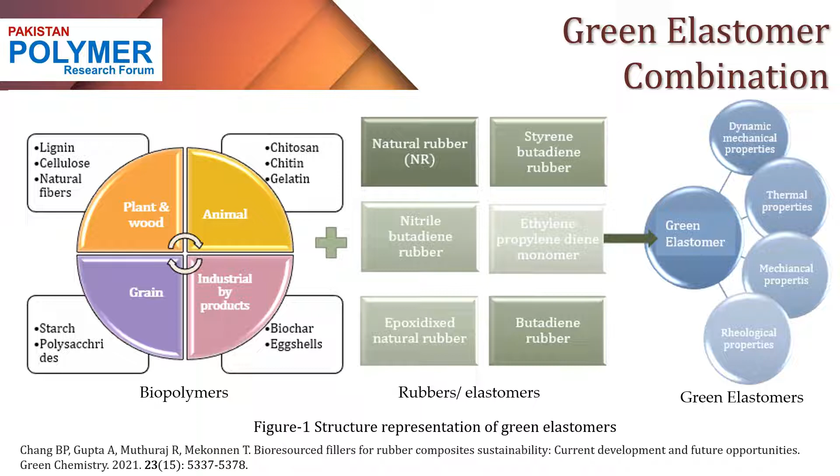All of these biopolymers can be incorporated into all of these rubbers as per your application or demand. You can combine these two components with the addition of other additives to produce green elastomers, achieving dynamic mechanical properties, enhancement in mechanical properties, thermal properties, and especially rheological properties.

Biopolymers are materials that originate from plant or animal sources. These are the true replacement of synthetic, non-renewable, non-biodegradable materials. Nowadays industries and companies are moving towards a substitute and replacement of these non-renewable materials, shifting towards bio-based or bio-sourced materials that originate from plants or animals.

Basically, if we talk about the incorporation of biopolymers in elastomers, the first filler that is most importantly used in the rubber industry or tire industry is carbon black.

Carbon black is a material produced from hydrocarbon cracking. This hydrocarbon cracking is very energy intensive and requires high energy for its production.

In the rubber industry, carbon black is by far the most important filler used up till now. But because of some drawbacks, the major one being non-renewability, people are now replacing it with biopolymers, as carbon black causes 2.5 tons of carbon dioxide release during the production of 1 ton of carbon black. That is a very huge quantity.

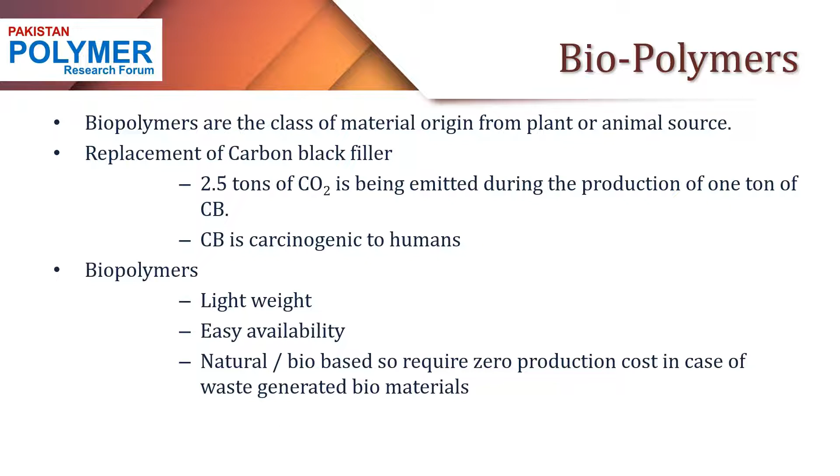The major and most important thing about biopolymers is that they are eco-friendly. Most of them are biodegradable and renewable. Because of these reasons, they are increasingly being used nowadays.

But the major disadvantage of biopolymers, irrespective of their large number of advantages, is that they are hydrophilic in nature, while polymers are intrinsically hydrophobic. Because of this hydrophilicity and hydrophobicity mismatch, the compatibility of these bio-based polymers with elastomers is tricky and is a major point of discussion.

But this issue could be overcome or minimized by surface treatment of biopolymers with certain specific chemicals that can improve the compatibility of bio-based polymers with the elastomers.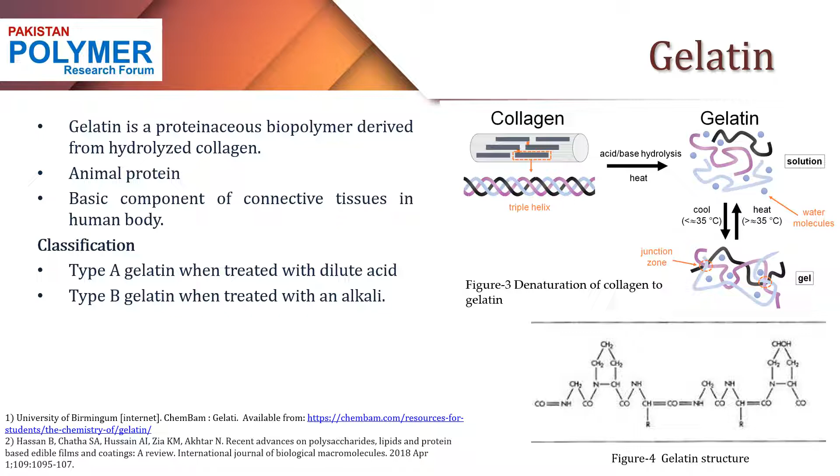For my research proposal, I have displayed one of the key reference recipes here, being the combination of rubber, cross-linking agent, filler, activator and accelerator. In this you can see I have added 100 phr of NBR, then the filler, that is gelatin, is at 30 phr. ZnO, stearic acid, TBBS are the accelerators and activators, added from 0.7 to 3 phr, and sulfur being the curing agent added in this formulation.

From this formulation, I expect to produce an elastomer with a tensile strength of 28 Newton per millimeter square, hardness of 69 to 80 Shore A, tear strength of 30 Newton per millimeter, cross-link density of 8 x 10^-4 mole per centimeter cube, and abrasion resistance of about 135% volume loss.

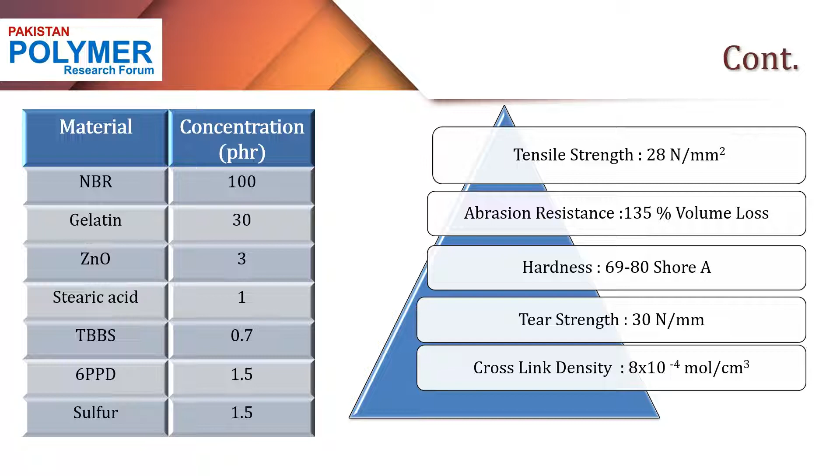The first methodology was the silanization of silica. As the first step, I used silica as a compatibilizer in this elastomeric formulation, as silica is the second most abundantly used filler in elastomers after carbon black. So I selected silanized silica as a compatibilizer in this elastomer.

The second step was the selection of gelatin, which was gelatinized in the presence of water under specific temperature and time conditions. The third step was the melt blending of this gelatin and silica with NBR rubber and the specific curing agent.

As described above, the accelerators, activators and curing agent were added in the internal mixer. The fourth step was proper compounding and mixing of this internal mixer blend in the two-roller mill to achieve proper dispersion and distribution. The fifth step was compression molding of this elastomer to make sheets and specific samples for testing purposes. The last step was the testing and comparison of the results.

As far as the graphs are concerned, the first graph represents the effect of filler concentration on the cross-link density of the elastomers. Let me first describe the top left block showing the formulation. The control formulation is that formulation that possesses 0 phr of filler, while the red line shows formulations having gelatin filler in various phr, starting from 10 phr to 50 phr.

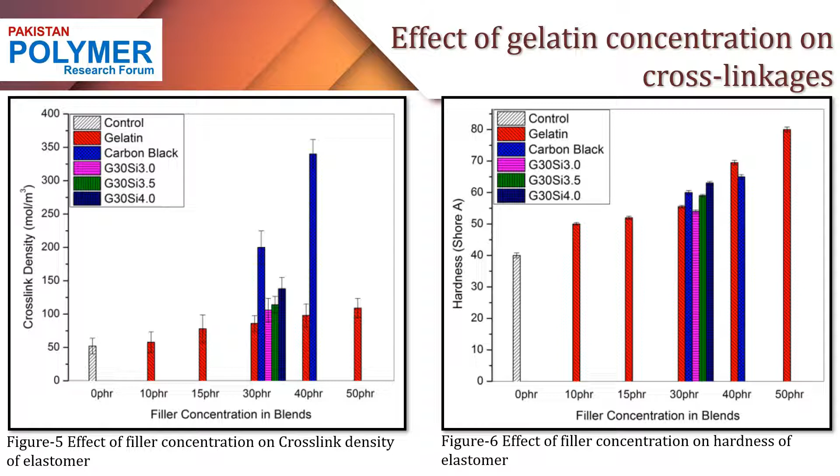Along with this, you can also see that increasing concentration of silanized silica, acting as a compatibilizer, again increases the number of cross-linking points, which increases the hardness of the material, making it stiffer and reducing elasticity, compared to the 0 phr elastomer which possesses 40 Shore hardness. You can see in the left graph the representation of filler concentration on the tensile strength or mechanical strength of the blend.

But on increasing gelatin concentration from 30 to 50 phr, the tensile strength goes on decreasing. This behavior might be because of the increase in filler bonding or filler agglomerate formation that reduces the transference of load from matrix to the filler. This reduces the tensile strength as it makes the elastomer more brittle and reduces the strength of the elastomer.

Along with this, you can see the same trend as silanized silica represented in the cross-link density and hardness. On increasing the silanized silica quantity, the tensile strength goes on increasing, but carbon black shows the highest cross-link density. Along with this, it shows the maximum tensile strength.

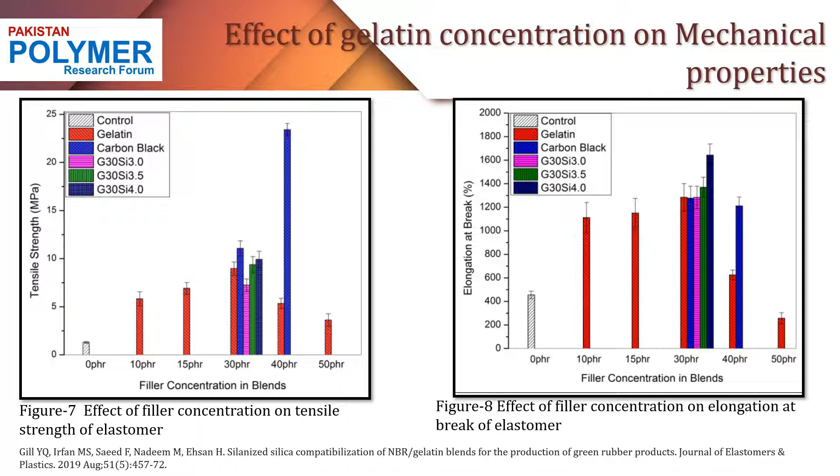But again, the silanized silica acting as a compatibilizer forms specific bonds with the rubber and the gelatin that improve the mechanical properties in cross-link density and hardness values. All these results depicted that increasing concentration of gelatin causes an increase in the mechanical properties and improvement in the mechanical and cross-link density performance of the elastomers. Along with this, these results show that comparable mechanical behavior is achieved by biopolymers as compared to synthetically made carbon black or any other filler.

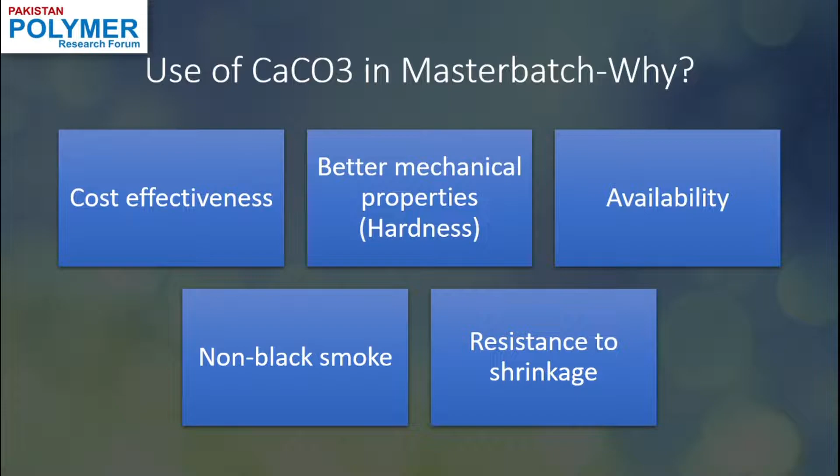Calcium carbonate is being used in the manufacturing of polymer master batch, and how much should be used? The amount of calcium carbonate that can be used is up to 80%. It totally depends on the end product properties that you are striving to achieve.

The more calcium carbonate you use, the less transparent films you'll get, because transparency is actually a property you achieve by using the polymers, especially LDPE, and it's not a property of the calcium carbonate filler. So the more calcium carbonate filler you use in your master batch, the less transparent and more whitish and opaque films you'll get.

Another property that is affected other than transparency is the flexibility of the films. Since we know that calcium carbonate isn't flexible, it's rather hard. So the more calcium carbonate filler we use in our master batch, the less flexible films we'll get. And so you're paying the cost of lowering the properties when you're making low-cost master batch.

But for end products that are to be used in very low-grade applications, such as making a garbage bag or something like that, you can easily use up to 80% calcium carbonate to make a low-quality master batch that can be used fairly well in your application while reducing the cost at the same time. However, when you are striving to achieve films which are more flexible and more transparent, you have to reduce the amount of calcium carbonate that you're using.

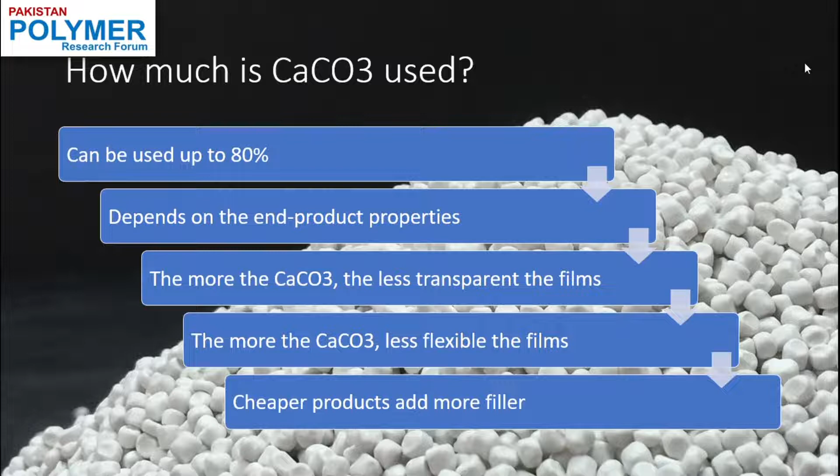There is a general rule that if you have small-size calcium carbonate, it will probably have high oil absorption and you have to use more resin as compared to using larger particle size calcium carbonate. So for the choice of resin for the formulation, you'll be considering not just the quality of your calcium carbonate; you have to take into consideration its properties such as particle size and oil absorption. These and other properties of calcium carbonate are necessary because you're using it in a larger amount, like up to 80%, so it will surely have a very large impact on your end product and your processing.

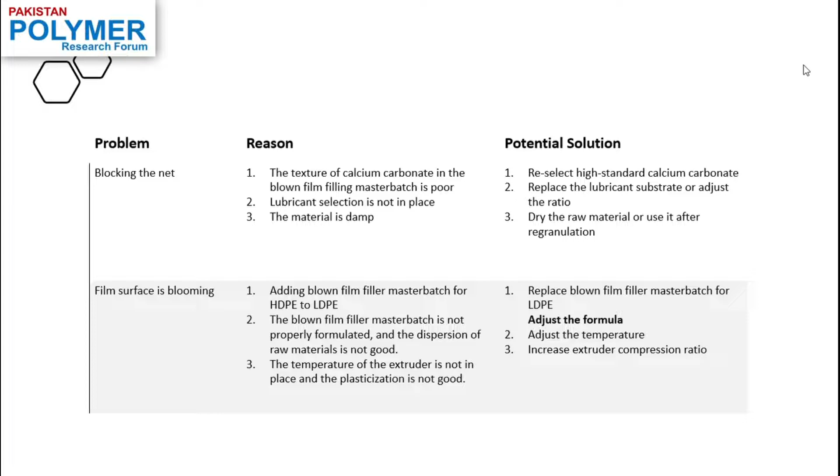Other problems include the film tear strength being impaired. This is more relevant to blown film, because if the inflation ratio or the drafting ratio is not in place, you might get a film with impaired tear strength. So it's important to adjust the ratio of the wind-up velocity and the exit velocity of the filament, as well as the inflation ratio of your blown film.

Another very common problem, related to your raw material and highly dependent on your calcium carbonate, is the fish eyes that occur in your blown film. Fish eyes occur because you might be using calcium carbonate that has been left in a bad condition for a long time, and the material has got moisture in it. So it's really important to check if your material is moist or not.

In case it has moisture, you should reduce the loading of your material, because the lower the loading rate, the more time it will get dried inside the extrusion process. You can also use industrial dryers and desiccants as a solution to the moisture, but desiccants cannot be used over 1.5% of the total compound, because it will increase the cost of your compound, and there will be no point of using a filler master batch in that case.

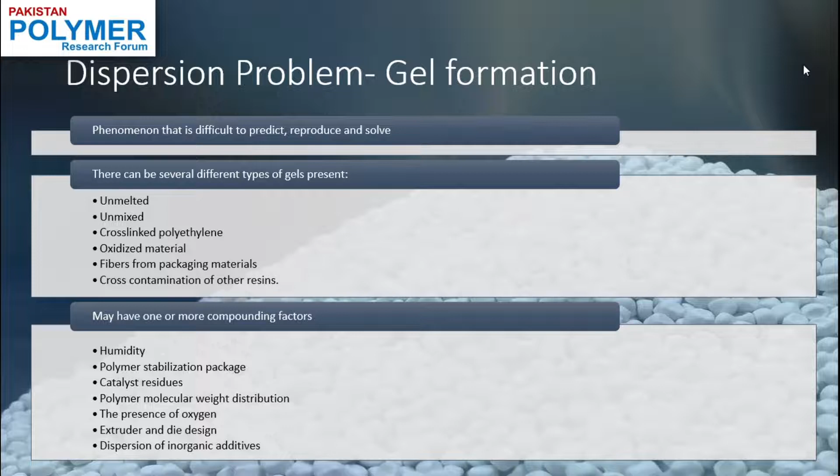So we'll be first looking at the thermally cross-linked gels and the highly oxidized gels. These types of gels are usually generated in the stagnant regions of the extruder screws and the transfer lines. And the most common regions for the degradation are the flight radii in the metering section and the deep flutes of the Maddock style mixers.

For our consideration, we'll be looking at the flight radii, which is a very common place of the creation of these types of gels. So the flight radii in the metering section of the screw should be relatively large to the local channel depth, because if the radii are small, eddies can occur.

These eddies are actually called the Moffatt eddies, and they can create regions with long residence times. And these regions can act as a location where the resin can degrade because of staying for a longer period of time. So the sharp corners are the places where these Moffatt eddies are created as secondary flows. And simple process upsets can knock the degradation off of the flights and into the main flow, which will eventually create defects in the film product.

To cope with these types of gels, it is recommended that the owner of the extruder should request the rebuilder to maintain the flight radii size, especially for a first-time rebuild with a new fabricator. When the screw is returned to the plant after rebuilding, the screw should be inspected for flaws, including the flight radii size, before the screw is placed into storage.

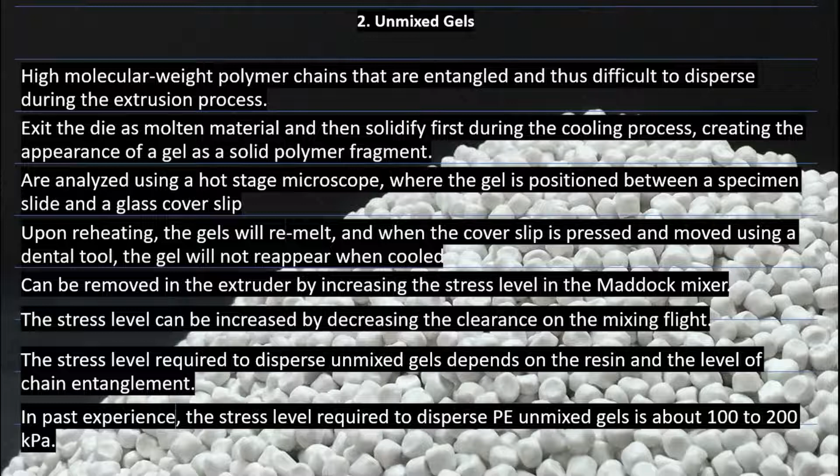So what we summarize from this is that we should be using a high quality calcium carbonate even if we are using it as a filler, and our goal is to reduce the cost of our product. We should be using a high quality filler because the quality of the filler will be affecting your overall processing as well as your end product.

Secondly, we have noticed that using the correct amount of the filler is also really important, because the more filler you use, the lower the properties or appearance of your end product, especially the films, will be. Using the correct procedure is really important while manufacturing the calcium carbonate filled master batches. As we have seen, if the procedure is not correct, and if you're not using the right parameters, you will be getting problems during the processing and in your end product.

So it's really important to use the right properties of the calcium carbonate, because if, let's say, your calcium carbonate doesn't have the lowest amount of impurities, it will cause issues while you're passing it through the extruder, and it will cause contamination in the film. And if you're not using the right whiteness of the calcium carbonate, you'll be getting films that are not white enough and that are yellower in appearance, and it will also reduce the overall quality of your product.

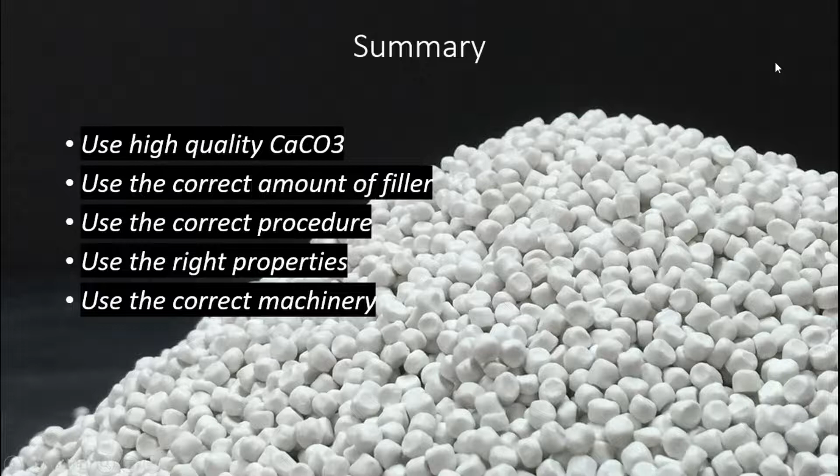Oh, thanks a lot, Isha. It's an excellent presentation on the problems and the dispersion, and probably showing how to overcome the problems. You mentioned it very nicely. Thank you very much.

Okay, we are almost done with the presentations. If you have any comments on this presentation, I would like you to put them in the question box.